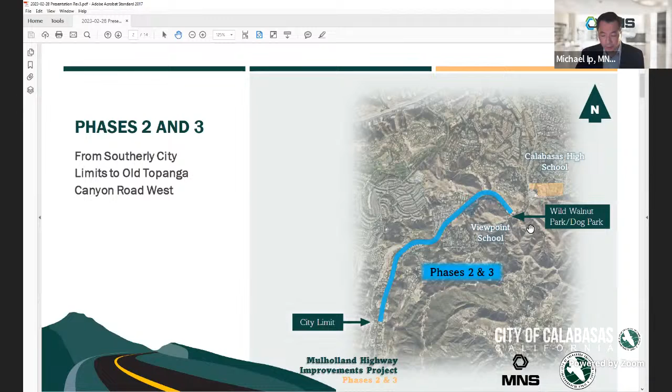The goal for phases 2 and 3 is to improve the safety of this corridor and provide additional capacity at the Viewpoint School, and also to preserve the scenic corridor. Even though we're doing improvements, we want to make sure we keep this scenic route.

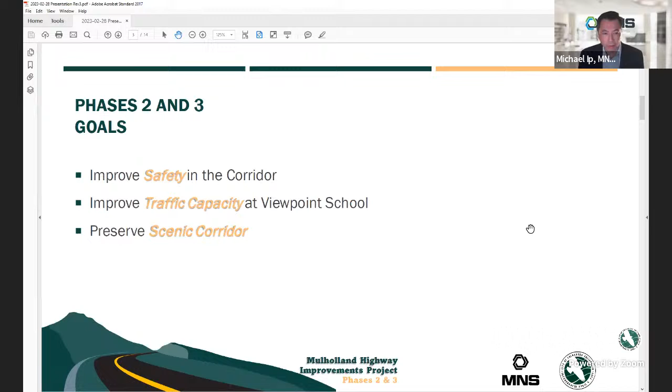As far as the features of this project, improving the roadway shoulders and also improving the roadway section. As you see in this picture, some of the shoulders are quite steep.

Michael, can you let us know where these photographs are taken, their compass direction, and general location? Sure, this picture is probably just north of Dry Canyon Road, facing north as you're going north. But I think in general, this is typical of the roadway shoulders present in the area.

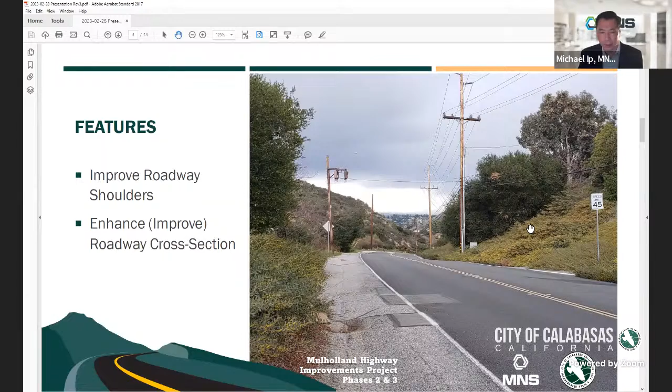Other features: this is at the Viewpoint School, Mulholland facing southbound at the driveway entrance of Viewpoint. As part of this project, we're going to be adding a new northbound right turn lane, which will require a caisson retaining wall to make that happen. We also are going to increase the southbound left turn lane lengths at Dry Canyon Cold Creek Road, to help through traffic as people are trying to get in and out of the school.

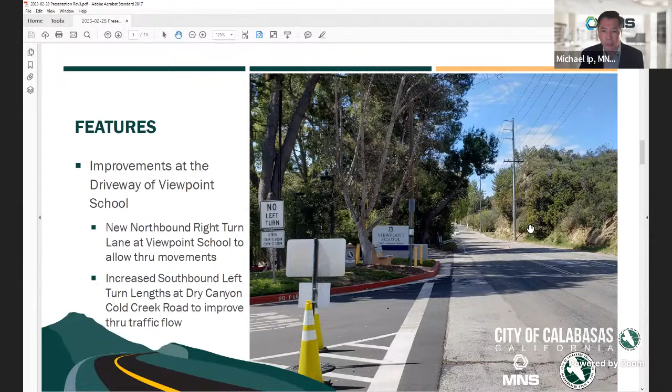Another part of this project is safety, stabilizing the hillside slopes and limiting slough off and debris onto the roadway. I believe this is looking north, near the southerly limits. There's definitely a real steep hillside here, with a lot of slough off, and K-rail on the east or right side of the road going northbound.

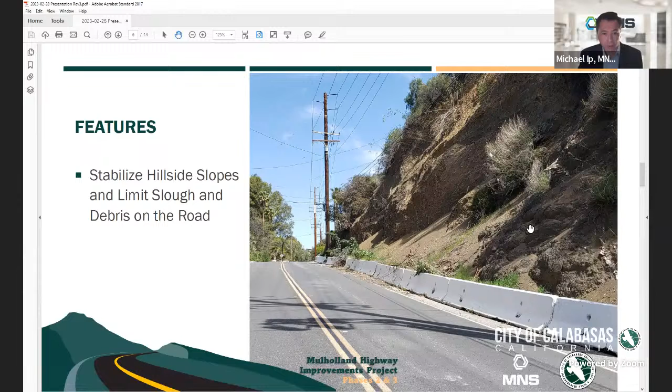As far as stabilizing the hillside slopes, there are really four methods we'll be employing, depending on the hillside geology and the space available for these treatments. There's shotcrete, shown as purple dots, more on the southerly section where the real steep hillside on either side is located. There are also areas where we'll be doing TECCO wire netting, shown as red dots. The yellow indicates erosion control matting, turf reinforced mats that we'll put in those areas. Lastly, the green indicates where we'll regrade to make those slopes less steep, so there's less erosion.

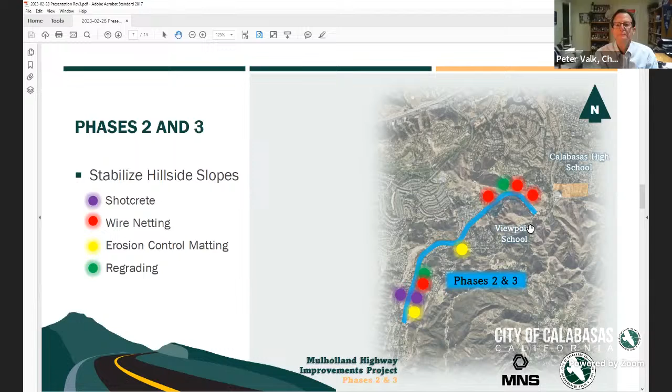We just wanted to show you a little bit of what the proposed improvements would look like. This is, I believe, looking southbound, you see those K-rails again, but the idea is to do shotcrete on either side of this to stabilize the hillside in this location.

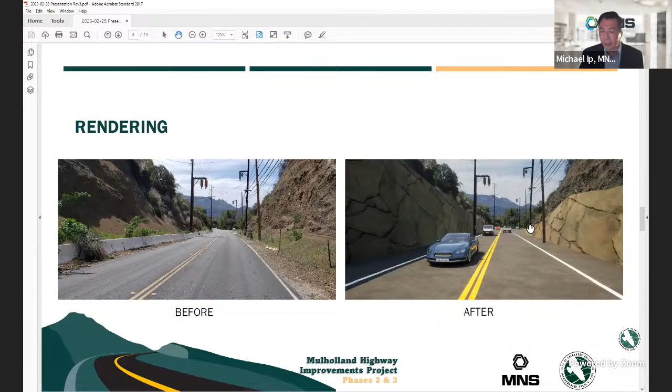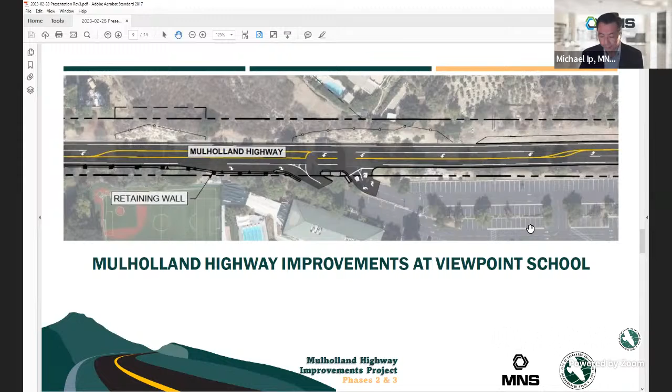As far as construction costs, we split into 3 segments: one from the southerly city limits to Turtle Creek, from Turtle Creek to Dry Canyon, Cold Creek Road, and then from there to Old Topanga Canyon Road West.

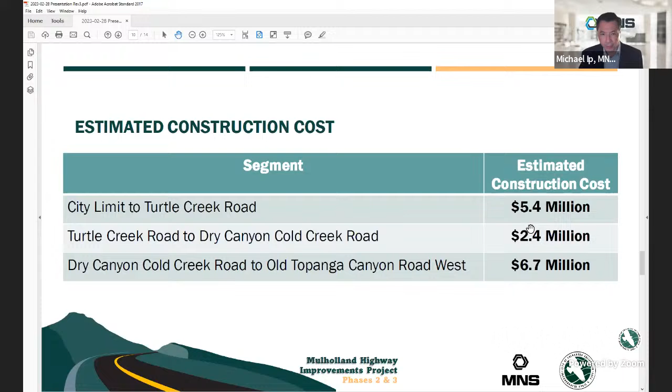The next slide shows pictorially where these costs would be spent, the 5.4 million and so forth. As you notice, 6.7 is the highest, and that's near the Viewpoint School, where there needs to be a lot more work.

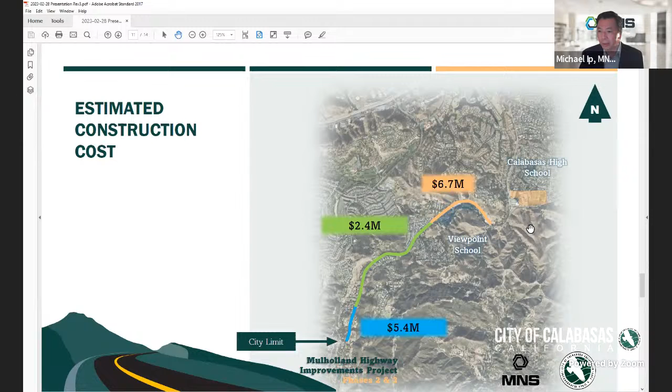So the next step is to develop some priorities as far as improvements, because we do have limited funds, and then develop the phases depending on how much funds are available.

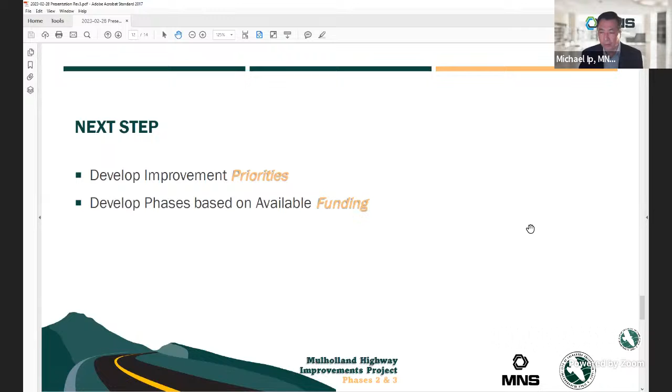As far as schedule, we're working to try to get the phase 2 package out this summer. We're doing the design and also the environmental clearance as we speak. Depending on what the city chooses as far as priorities and locations, then we'll bid that package out.

That's it as far as questions and any other questions. I suppose Tatiana is the city PM as far as contact.

Very good, thank you very much. Very useful, and great to hear an update on phases 2 and 3.

Tatiana, to close up the presentation part of this, can you elaborate a little bit on timing of securing funds, final design, construction, and completion? Four different items. Absolutely, absolutely.

As Michael mentioned, we're working on the design right now, and with your inputs and comments today we will continue working on that and go towards the final design. At the same time, we're working on the environmental documentation, and we're currently reviewing the draft MND, mitigated negative declaration. That process may take some time to go through all the reviews and required approvals, public reviews and approvals.

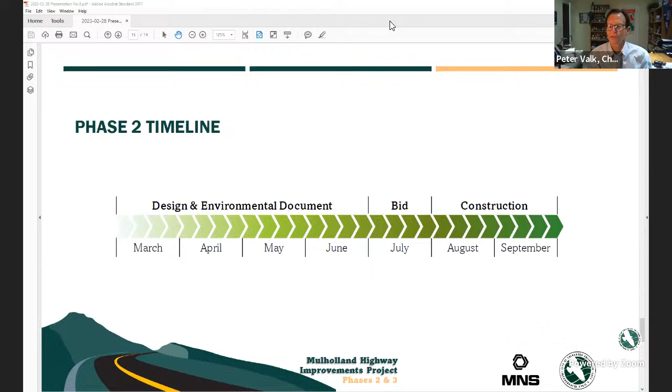Hearing none, we'll close this item, close the workshop, and move on to item number 2, which is the citywide Green Street project, Las Virgenes Road, Thousand Oaks Boulevard roundabout.

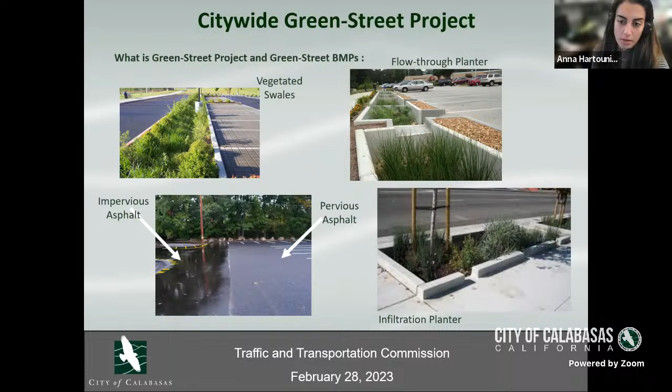This project will be composed of two phases. Phase 1 will target improving northern Las Virgenes Road, Mureau Road, and Calabasas Road. Phase 2 will be construction of the roundabout at the intersection of Thousand Oaks Boulevard and Las Virgenes Road.

To walk you briefly through the design, a cul-de-sac will be built at the northern terminus of the roadway. The unpaved shoulder along Las Virgenes Road will be paved and striped for parking. Refuge islands will be built between the designated parking areas and the actual roadway to help protect pedestrians that choose to move around this area. Crosswalks will be striped to help pedestrians cross from designated parking areas across the road to the apartments. Exits and entrances are designed to be very close to each other for easy access in and out from the designated parking areas.

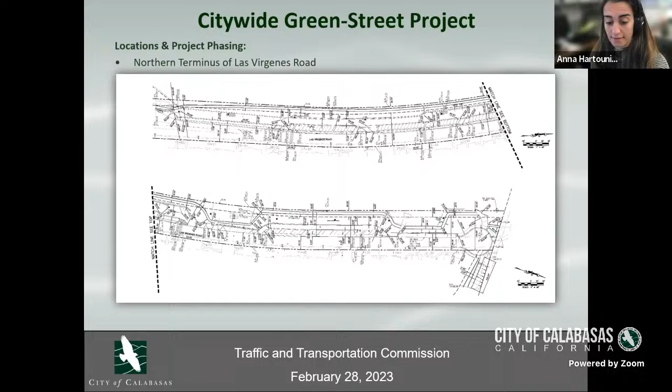Trails will be improved and extended to give hikers the opportunity to hike all the way from Mount Calabasas to the upper Las Virgenes Canyon open space, which is an access point to the Simi Trail network. It will provide efficient exit and entrances to the emergency roadways designated for emergency vehicles to access the hillside.

The Calabasas Road portion is approximately 11,000 square foot area located adjacent to West Calabasas Road, within property addressed at 24439 Calabasas Road, and the actual roadway. The proposed infiltration planter will provide stormwater treatment as well as peak flow attenuation through storage, infiltration, and absorption. This improvement will not impact traffic.

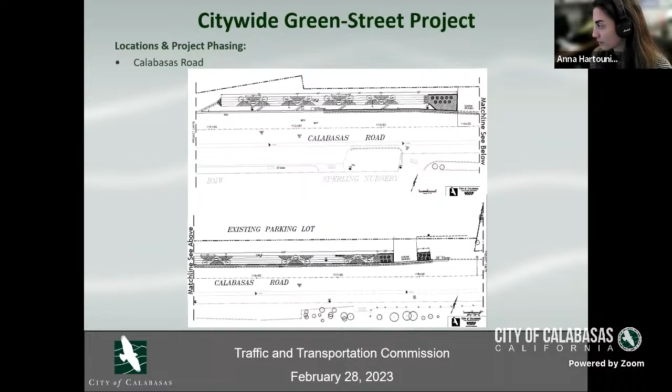On the west side of Mureau Road, the proposed medians at Mureau Road, close to the intersection of Mureau and Las Virgenes roads, will be placed within the existing yellow cross-hashed line area without impacting the width of the roadway or any existing traffic lanes. This is an attempt to reduce impervious surfaces and contribute to the overall health of our watershed.

Proposed medians provide stormwater treatment through filtration and absorption. Stormwater is captured and treated via filtration through the soil media and root zone through the planted vegetation before entering the perforated pipe at the bottom of the planter and discharging back to the storm drain system.

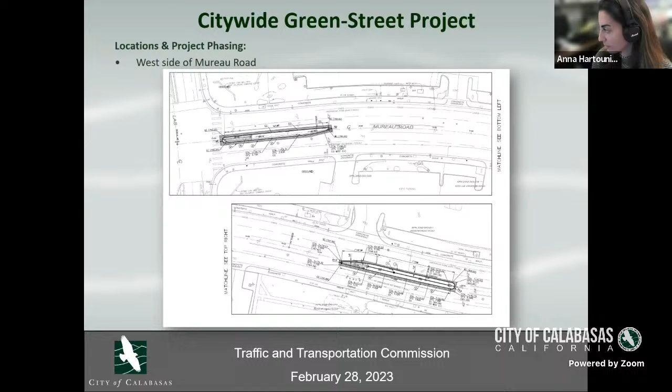So phase 2 of this project will concentrate on building a roundabout at the intersection of Las Virgenes Road and Thousand Oaks Boulevard. A quick summary on the existing traffic operation at this intersection.

The collected data from March 2022 shows that AM peak is the heaviest in terms of vehicular traffic, with heavy southbound through and westbound left movements. During PM peak hours, the heaviest vehicular movements are westbound left and northbound right traffic, which are not contradicting movements and create the most preferable condition for building a roundabout.

In terms of bicyclist and pedestrian traffic, PM peak hours are heaviest. Traffic operation analyses were run by GHD, a well-established private roundabout design firm well-known in the industry. Results show a single lane roundabout is sufficient since the level of service is grade A and above. And even with a 1% projected growth rate, traffic will still operate within grades A and B.

As shown with the results from SIDRA, the current existing westbound left movement queues about 20 or more vehicles, versus 8 to 10 vehicles even with the projected growth rate with the roundabout intersection.

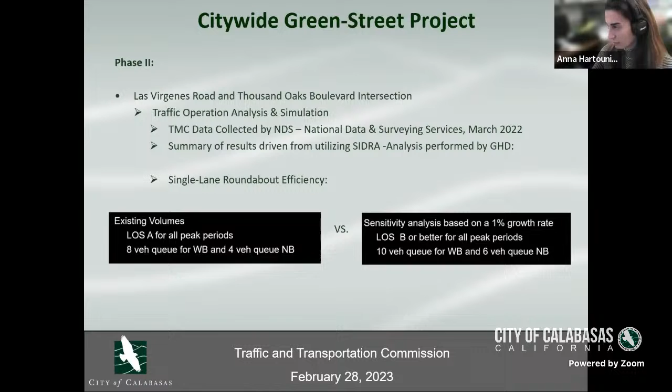What this basically translates to, as shown on the synchro simulation, is a significant reduction in delays and a smooth flow without stoppage as vehicles approach the intersection. The current situation has the highest average delay. The roundabout also improves intersection safety, because the current intersection has 32 conflicting points, whereas the roundabout has only 8 conflicting points.

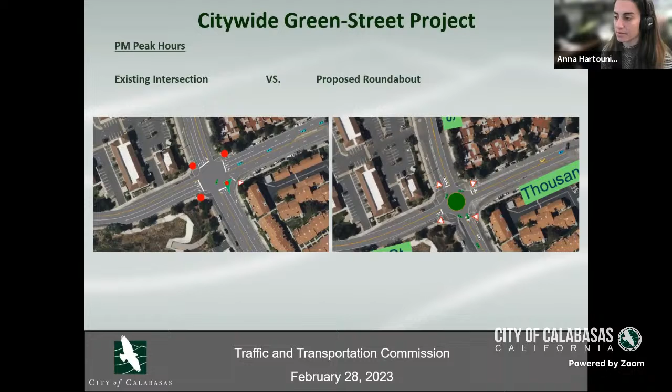Moving on to the design of the roundabout, the current preliminary design considers fast path design and encourages significant slowdown at the approach to the intersection by design. It considers truck turning capabilities and stopping sight distance at the entrance during circulatory moves, at the crosswalks, and overall intersection. The design will also be reviewed by multiple consultants for performance, efficiency, and effectiveness.

And with that said, I conclude my presentation.

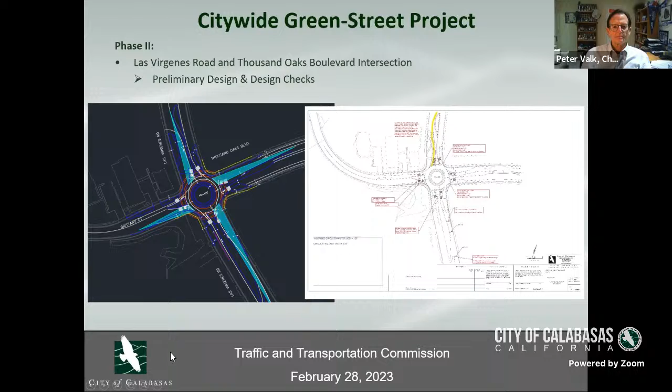If you could use your cursor to show us generally where the pedestrian crosswalk would be. Let me unmute myself. For northbound, here are the white lines representing the crosswalk striping. For westbound, here they are. Southbound, here it is. And eastbound, this is the crosswalk designated for pedestrian crossing.

And in the middle is a refuge space, right? Correct. Let's say you're crossing and all of a sudden one of those drivers that Joe is referring to who weren't very courteous were coming through. The pedestrian could keep themselves safe in a refuge space, correct?

If I use the roundabout near Paul Revere as reference, the crosswalk is not at the edge line of the roundabout, it's back a few feet. So you're in the vicinity of the roundabout, but your feet are not literally in the path of vehicle travel.

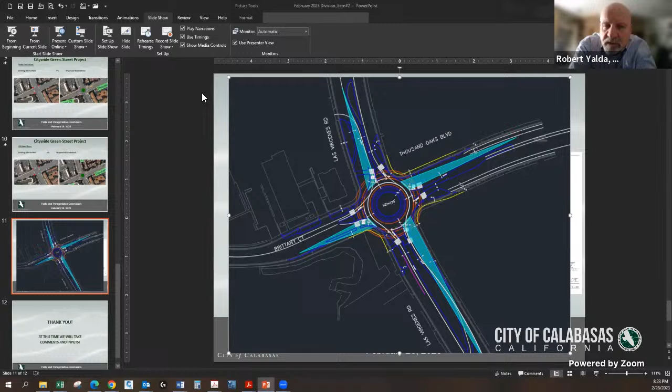And Mr. Chair, may I offer an explanation? Number one, when you're approaching the roundabout, the road narrows, so the travel distance for the pedestrian is reduced. And since the crossings are angled towards upcoming traffic, you're forced to look into what is coming toward you. Then you walk to the refuge area, then you return and look at upcoming traffic from the opposite direction.

What I'd like to offer for any individual, citizen, commissioner, or member of the public, I'll be more than happy to host a half-an-hour meeting with them. They just call and make an appointment, and we will go over this design with them and show them what we're talking about.

These are all results of study through ITE. We're hiring an expert consultant who designed the roundabout and is assisting our team, as was mentioned. At this stage, this is about 60% design. It will narrow the area that pedestrians need to cross, and this new roundabout will have crosswalks on all 4 corners compared to the last one, which had limited crossing.

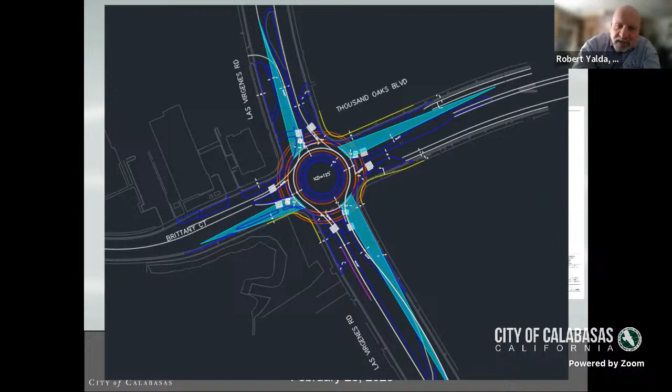One further clarification, Tatiana. Mike asked the question about, what about a traffic signal? A traffic signal was looked at. The roundabout is the best option for this intersection operation-wise.

As Anna had in her presentation, that synchro analysis with the traffic flow, you can see that there's no queues. The traffic moves smoothly. With a traffic signal, especially having these heavy movements where there's only two legs of the intersection basically, it's not a balanced intersection. So we'd hold all the traffic, but it's not balanced. So the roundabout, again, is the best option.

Thank you. I have a few quick questions. When do you expect the contract for this to be posted and proposals solicited? We're working on the bid package for phase 1 of this project. We're trying to advertise soon, in the next few months. And for phase 2 with the roundabout, we're looking at next year.

Thank you. Second question, is this area subject to temporary flooding? I think we're all familiar with that from last Friday. This intersection is actually designed to drain pretty well, and we did not experience any flooding at this intersection. That's, again, the way we're designing this roundabout, that's the ideal location for running this first flush of stormwater through the roundabout and clearing the water through it.

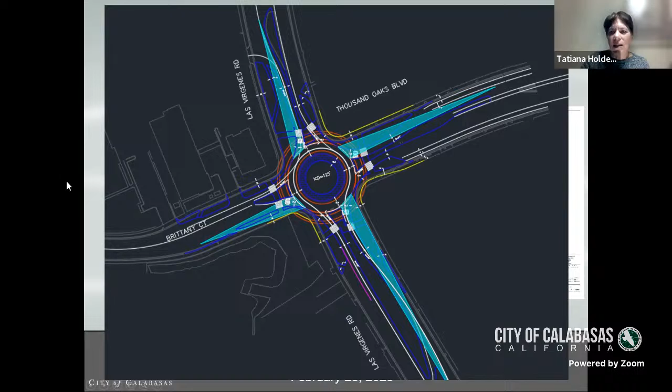Two design issues. One, in the area near the cul-de-sac, it looks like there are some areas that will be used for parking. Is that correct? You're talking about the Brittany Court here? I'm talking about the area near the Las Virgenes trailhead. Oh, okay. Yes, the design includes several areas for parking.

There will be improved street parking as well as off-street parking. We know that area really needs that, and we can see on a daily basis how many cars are just parked on the side of the road, on the dirt shoulder, without any order. So that improvement, yes, includes parking. Anna, do you know how many parking spaces we're adding there?

Are the parking spaces intended to be used 24/7 for recreational users, for residents, or without limits? Or both recreational and residential? Will there be any type of curb management restrictions, time of day, length of stay, things like that? Since it's right across from the residential area, no, there will be no restrictions so that they can park. During the weekends, we'll see how it works for recreational purposes, how many people will be coming to use the trail.

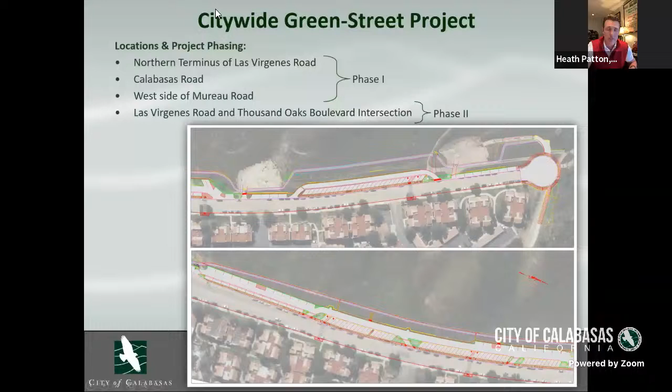I just want to make a quick mention to thank the staff for their time on this project. I also want to personally thank Director Robert Yalda, who has offered his time to share this with the community and answer questions, because that particular intersection has been a challenge. I am a resident of the West Side as well, and I appreciate everybody taking a look at this. Again, Robert, being able to take 30 minutes and have a conversation with residents in this area is fantastic. So we all thank you, and I'll make myself available as well. Thank you, Chair, back to you.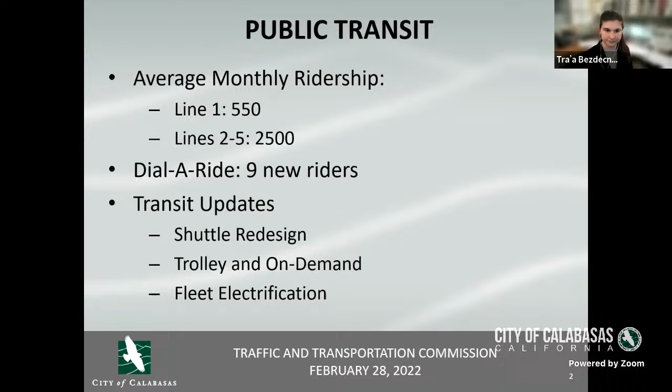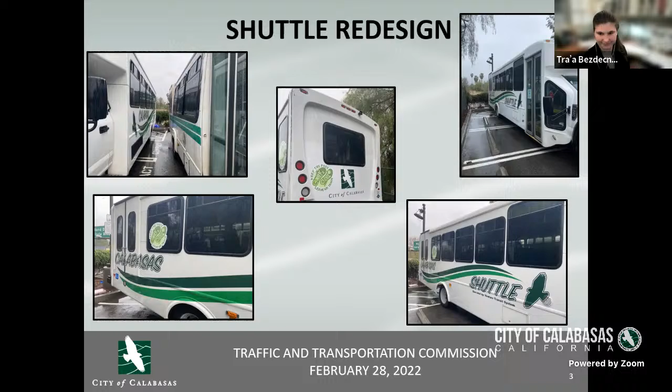At our last TTC meeting, staff presented the idea of a weekend on-demand transit program to replace our trolley program. In January, Council accepted an amendment to our contract to create this program with dial-a-ride. On February 11th, two weekends ago, was the trolley's last day, and February 18th was when we started the new service. So far, it has been a pretty good success. We've already beat our average ridership of the trolley from the last 4 months in just the last 2 weekends. Staff is investigating more innovative solutions to present to council in April.

Here's a quick look at the website for the pilot program. You can find this on the cityofcalabasas.com website and search for the demand response program. It has all of the information, the hours of service, the fees, and all of our locations outside of the city that you can go to, including the Canoga Orange G Line station, which was recommended by our own TTC chair after he started using our dial-a-ride service last year.

And then, of course, you can go anywhere within the city limits. As mentioned before, staff is investigating more innovative on-demand solutions for City Council. The buzzword for this type of service is microtransit, so that's kind of interchangeable, on-demand and microtransit. Options we have to investigate include looking at a software-only dispatching service or a turnkey software plus vehicle provided.

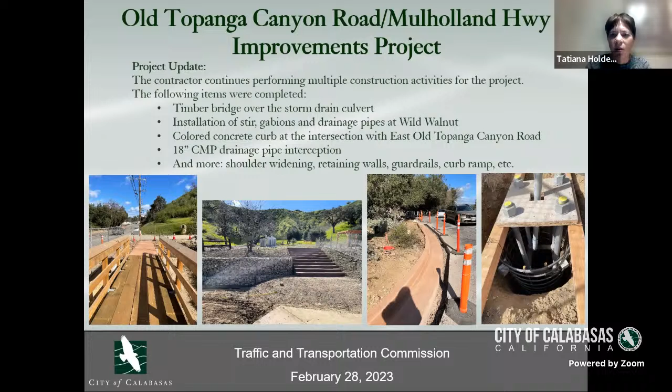18-inch pipe, drainage pipe interception they worked on. And of course there is more work, and there's just not enough time and room here to show pictures for every single one of them.

But there's shoulder widening, retaining walls, guardrails, curb ramps. The work is going on. The items currently in construction are the median island on Old Topanga Canyon Road by the exit from the high school, and traffic signal work. The electrical subcontractor is working on installation of the conduit and placement of the foundation of the poles. We're working with a number of utility companies, including Las Virgenes Municipal Water District and Southern California Edison, on different utility work. Expected completion is September, October of this year.

I have a quick question, Tatiana, and I'd encourage my other commissioners to ask points of clarification along the way. Please remind me where the sidewalk will be. Will it be going from Old Topanga, Mulholland, toward Wild Walnut Park? Will the sidewalk be on the left-hand side against the hillside, or on the right side along the creek? The sidewalk will be on the left-hand side.

If you can see my cursor, this is the ramp for the future crosswalk across Mulholland. The sidewalk will start here on the south side of Mulholland, going through near the traffic signal, and will continue on that side. There will be a retaining wall here, and it will continue and lead to Wild Walnut Park. You can see parts of that sidewalk already constructed.

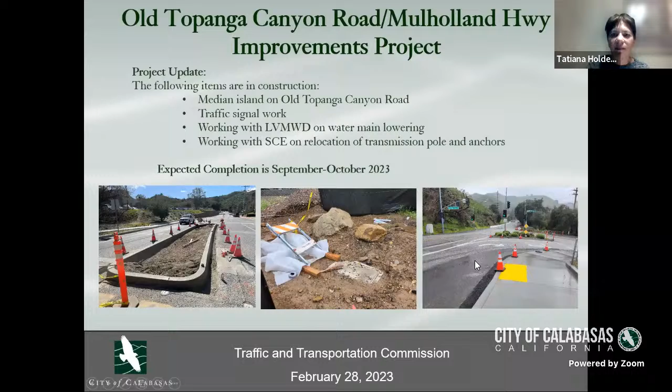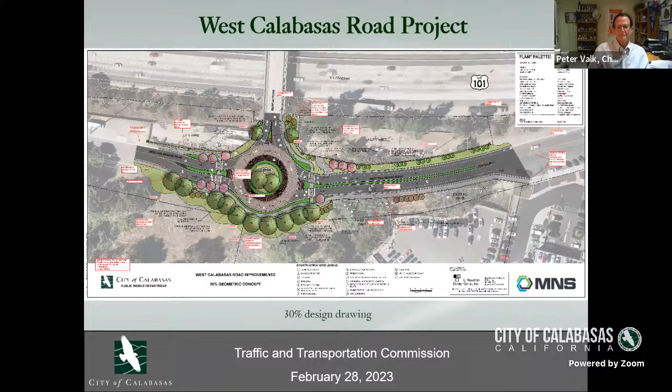This is an entry to the city for some people. Yes, it is. So paying attention to aesthetics is important. Yes, absolutely. The monument sign, like we have at any other entry in the city, will be added to this roundabout. Great, thank you. Any questions from my fellow commissioners? Thank you, Tatiana.

Another project update is the ADA curb ramp and sidewalk replacement project. If you remember, we completed phase 1 of this. This is a citywide project, but we divided it into 2 phases, and we completed the west side of the city. Now we're proceeding with the east side of the city.

We have funding for this project. We already went through the bid advertisement and the bid opening, and council already approved the contract. So we are waiting for the contract to be executed and the contractor to start working on the eastern side of the city. So you will see the contractor working on the sidewalk panels.

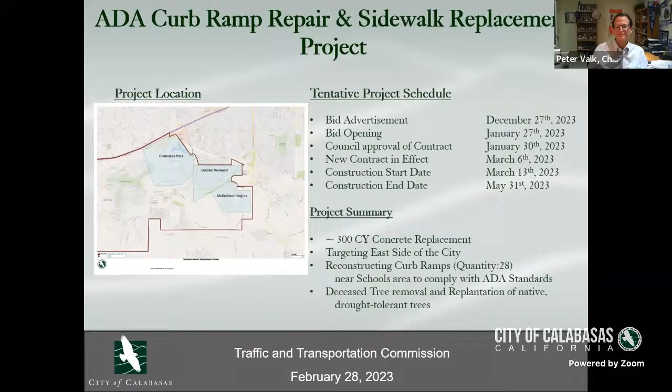Is this a full resurfacing or simply a slurry seal of cracks? It's a full resurfacing. Thank you, now I know the term slurry seal.

My only comment here, which you've kind of already mentioned, is that Park Granada and Park Capri, for people coming from the west side going to Calabasas High School, is a huge thoroughfare. You've already kind of got it covered so it won't interfere, but I figured I'd mention it.

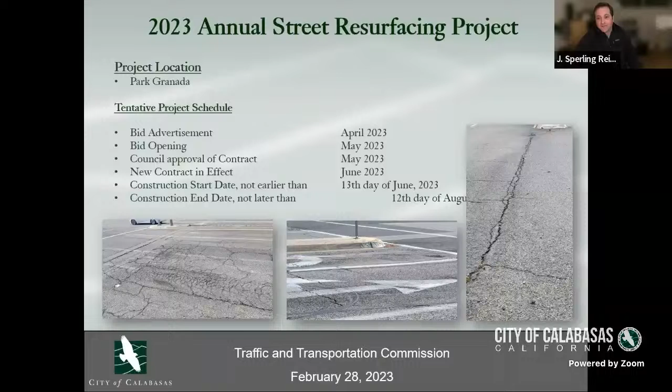Yes, thank you. The last slide on my division report, as usual, gives updates on how many requests we received through the Calabasas Connect system. There weren't too many, only 13, leading with street repairs, potholes, and sidewalk, curb and gutter repair, which we're addressing with our sidewalk panel replacement project. This concludes my division report.

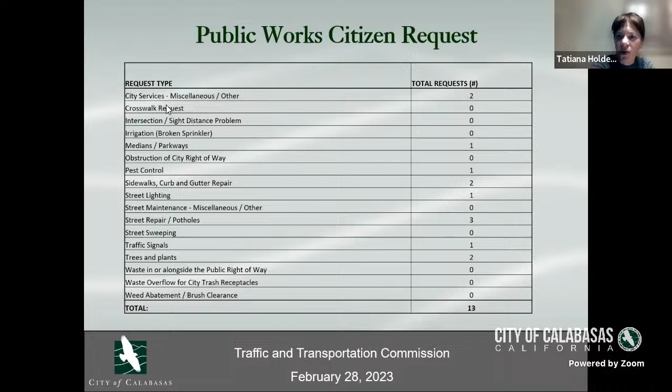I have a bonus presentation tonight. Although this item is not on the agenda, I would like to bring to the commissioners this presentation on the recent winter storm events and what our maintenance division, our superintendent, and his maintenance crew did, especially this last weekend with the big storm. There are pictures of locations and what's been happening over the past few days.

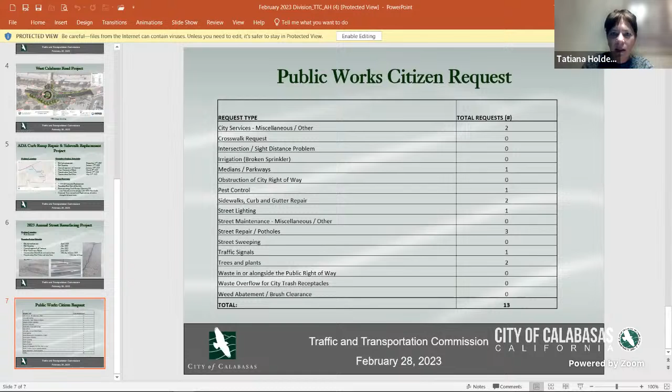Tatiana, I don't think you're sharing the presentation with the pictures. You're still sharing the old presentation. Really? I have this new presentation on my screen. No, you have to go down below and share. Let me try again. I apologize, let me start this presentation and share it again. Now I lost my Zoom. Okay, here we go. That looks right, great.

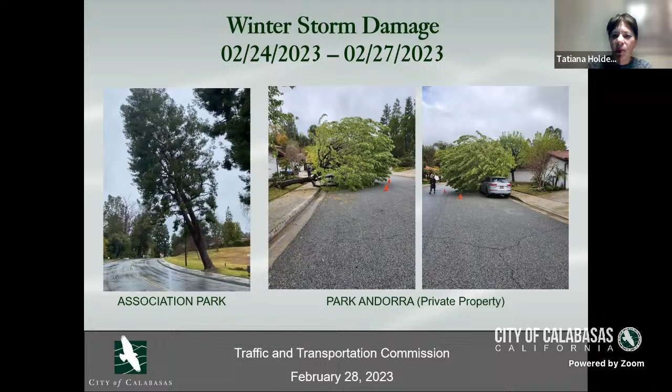So you can see these pictures at Association Park and Park Andorra with downed trees and leaning trees. There are more trees at McCoy Creek and Las Villas HOA. At Calabasas Park Estates, that's how many trees were addressed, the downed trees that were cut and removed.

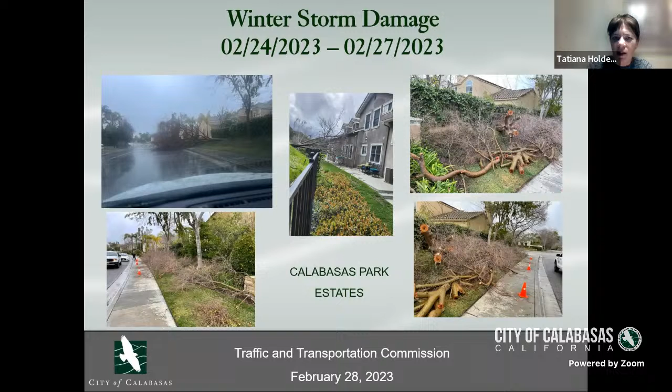Our crew made sure there was no road blockage, and they were able to work with the tree contractor to address that immediately. There was another incident at Bellagio, where a tree actually went down with a part of the slope.

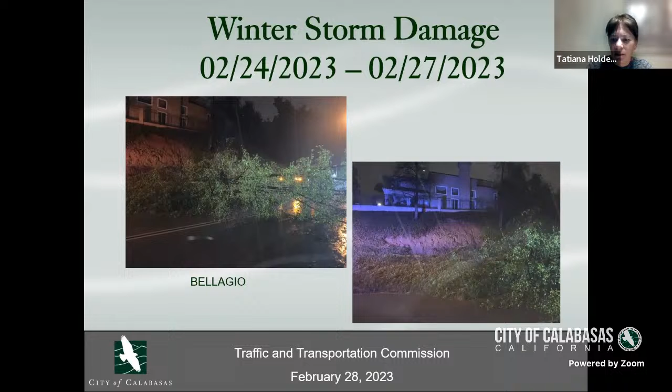At Vista Point, we had more trees trying to block the road. There's the Old Topanga Canyon south of Mulholland Highway, where we had a mudslide and the crew was working there. I know on Saturday alone, they went there three or four times to keep cleaning because more mud kept coming down onto the roadway.

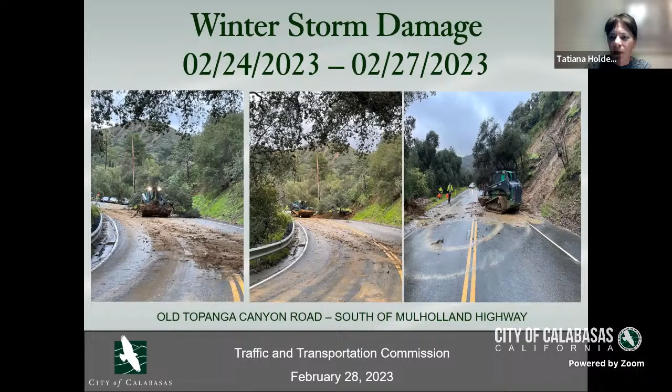This is the night picture again on Canyon Drive and Mulholland Highway, with more pictures at approximately the same area at Dry Canyon Cold Creek.

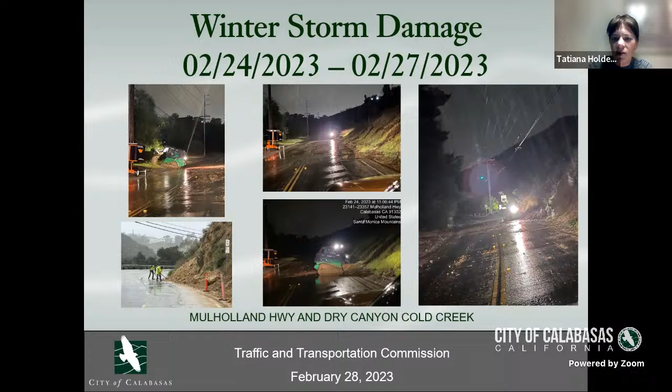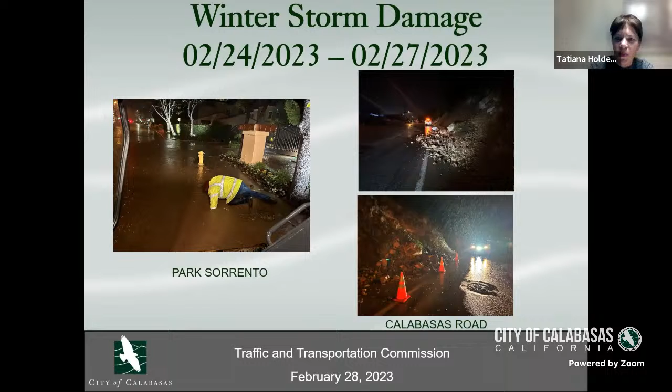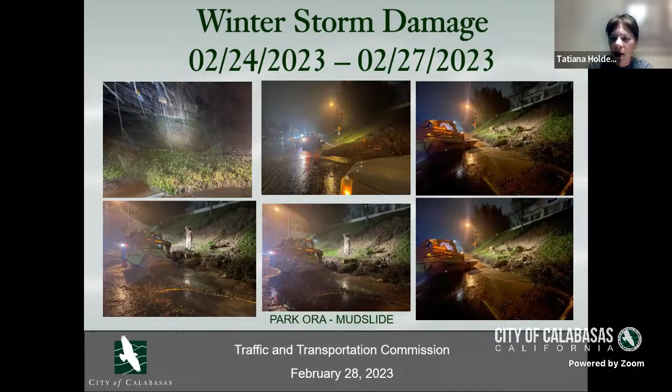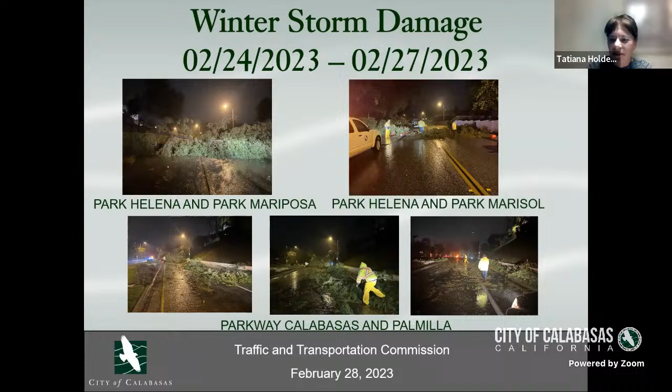And more in Parkway Calabasas, Park Helena. Are there any trees left in the city? All the trees decided to leave. Yeah, so much wind and so much water on already saturated ground. We had one bus shelter damaged at Parkway Calabasas and Park Granada.

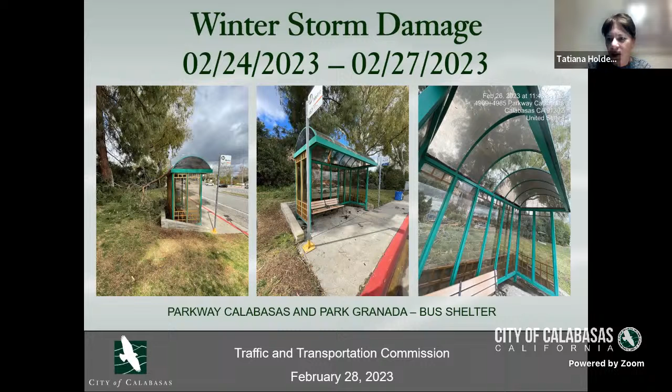I just would like to use this opportunity to thank our Public Works maintenance crew for all their hard work. They were there pretty much 24 hours, making sure that it's all clean and safe for our residents. Thank you very much to the teams that were out there in the road, including the guy who was laying down in the street in his yellow jacket, and to the people who helped direct their attention and provide the resources to get the job done. Thank you very much.

Thank you. Thank you for your words. Okay, Tatiana or Robert, future agenda items? We talked about one just a moment ago, bringing back the transit innovations topic. That sounds good.

Your commissioner may get a chance to use the dial-a-ride in the next few days. So I'll give you an update report on its status, and I'll make sure to bring two quarters with me. You should do that. They have quarters in their cars too. I know that. Or as I used to say it, quarters.

Sounds good. Any other items on the agenda? On the future agenda? I'll have one chair prerogative issue, and that is we have 2 rookies on the commission. 3 rookies. Robert or Tatiana, I think it would be very valuable for you to gather Heath, Richard, and Mike, either independently or together. And if they're together, they can't talk about anything that's in front of the commission, to our Traffic Operations Center.